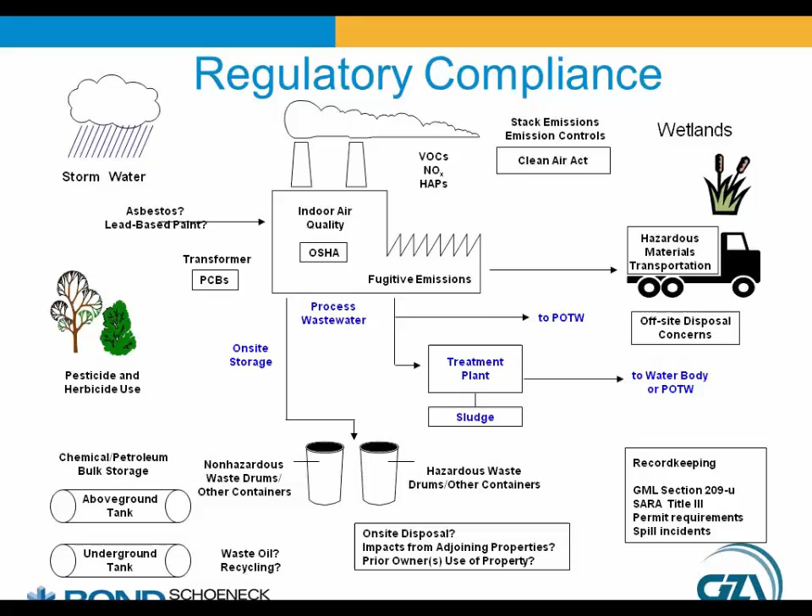But now, let's focus on what EPA considers to be an appropriate method for conducting a Phase 1 environmental site assessment. We start with EPA's approval of the use of the ASTM International Standard E1527-05 method in November 2006 to satisfy AAI. One of the advantages with the use of this method is that it looks for impacts of petroleum as well as hazardous substances. In fact, when DEC updated its Part 375 State Superfund Program, it specified the use of the ASTM E1527-05 method for AAI.

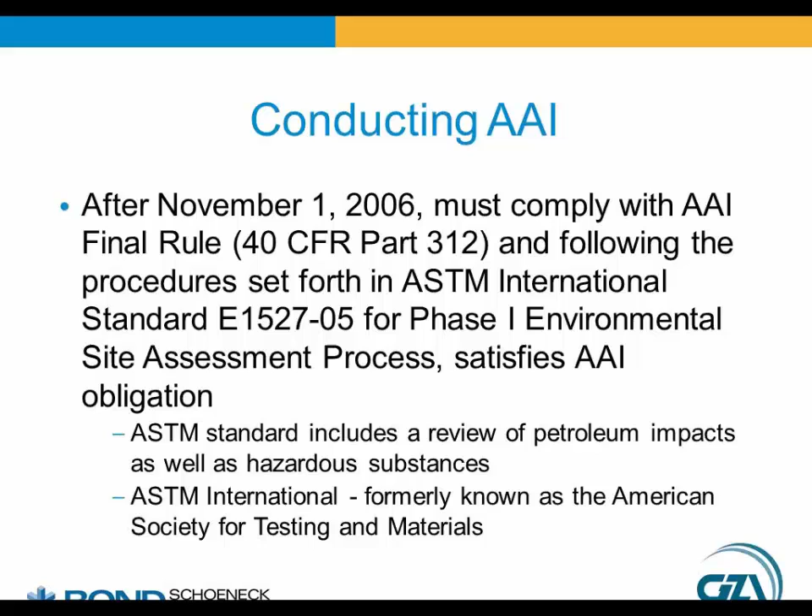ASTM then updated its Phase 1 ESA practice method with ASTM E1527-13. And EPA approved the use of this updated method as an AAI alternative in the December 30, 2013 Federal Register announcement. However, there was a concern about having both the earlier ASTM method and the updated method in play. So in June 2014, EPA proposed to delete the option of using the earlier method. In October 2014, it made the deletion of this earlier ASTM method final.

The due date for the exclusive use of ASTM E1527-13 for AAI compliance is October 6, 2015. This development was one of the drivers of this webinar. Note that this amendment will not affect the use of ASTM 1527-05 prior to the effective date of the new standard.

Before Ben walks us through the implementation of the ASTM E1527-13 method, I want to provide background on the two New York State programs that come into play in the Phase 1 ESA. They have a liability scheme similar to CERCLA and also look at the current owner and operator front and center in terms of liability for the cleanup of contamination.

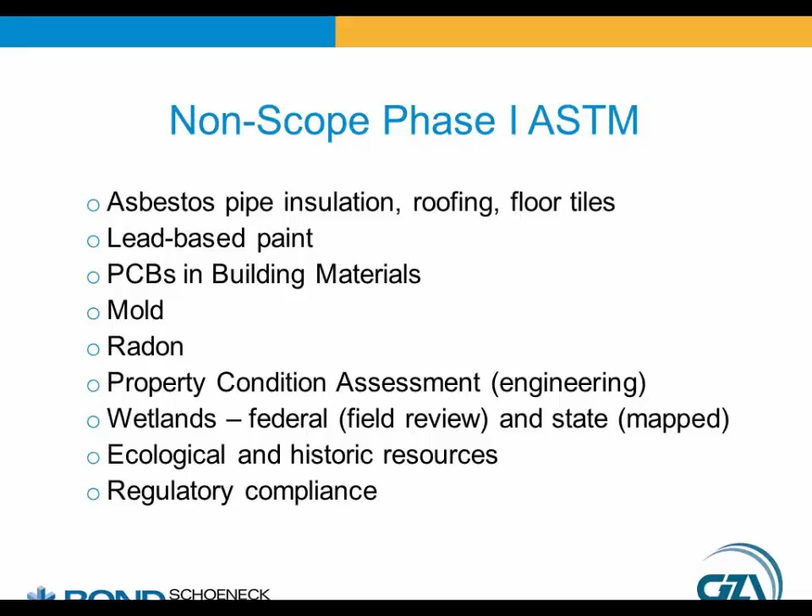As Barry discussed earlier, ASTM issued a new Phase 1 AAI guidance in 2013. What are the major differences between 1527-05 and -13? Let's focus on new and refined definitions. The addition of historical recognized environmental conditions and controlled recognized environmental conditions, also known as HRECs and CRECs. Definition of migrate was refined to include vapor in the subsurface. We'll discuss this in a bit. Indoor air quality, except where impacted by petroleum or hazardous substances, now is beyond the scope of the standard. And agency file reviews are now to cover adjacent properties.

Historical recognized environmental conditions, HRECs, include conditions that in the past may have been considered recognized environmental conditions, but have since been sufficiently investigated, remediated, and closed out with state regulators to residential or unrestricted standards. This can include items such as a once leaking petroleum storage tank that had been reported to the state, assigned a spill number, and cleaned up under a regulatory program such that the spill number was closed to unrestricted standards.

Controlled recognized environmental conditions, CRECs, are similar in that they do not at the present pose risks that would be associated with a REC. A CREC is a spill that has been closed out by the regulators with a risk-based approach, whereby the hazardous substance or petroleum remains in place, but analysis has determined that it poses no continuing threat to human health or the environment. This is often achieved by engineering controls such as placement of an impermeable cap over the contamination or the installation of sub-slab vapor mitigation systems in on-site buildings.

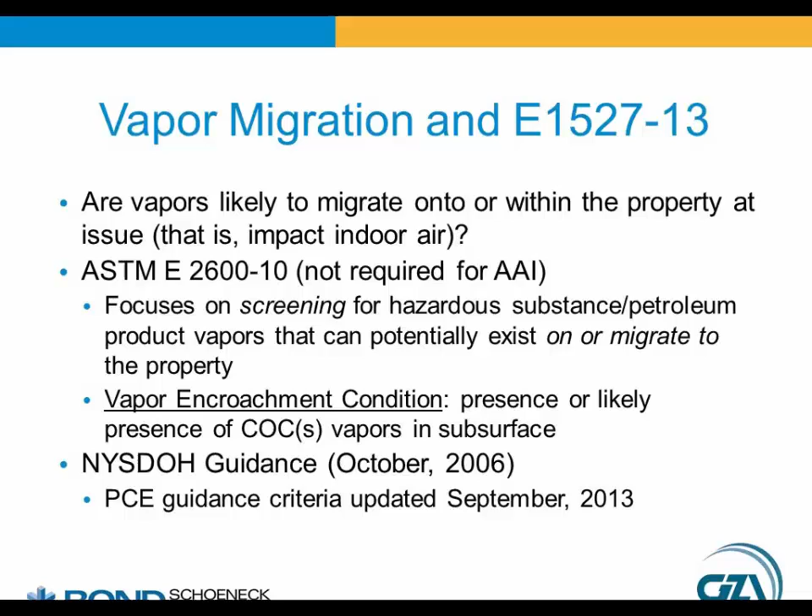I'll now walk you through a Phase 1 environmental site assessment. It is important to gather as much information up front about the property as possible. This allows for more efficient investigation. A user questionnaire is provided to the user of the Phase 1. Typically, this will be the purchaser, not the seller of the property. The user will provide any information they know that may indicate the presence of a REC, such as knowledge of past property uses, storage tanks, environmental proceedings, and any property documentation, such as surveys and as-built construction drawings.

Federal, state, and local records are reviewed. As discussed earlier, this now includes the subject property and adjacent parcels. Historical information is researched. Data can include historic aerial photographs and topographic maps that can be used to determine past uses of the site. For example, where former buildings, rail lines, or storage tanks were located on the property. City directories are reviewed to determine what types of businesses previously occupied the property. This can identify long past uses, such as a dry cleaner, that could have a negative impact on property redevelopment.

Geologic and hydrogeologic data are reviewed to determine the likely flow of groundwater, which could determine the likely transport direction of off-site contamination. An agency file review is one of the most important steps in the AAI process. Through Freedom of Information law requests, environmental records from state and local agencies that are publicly available, practically reviewable, and reasonably ascertainable can provide a comprehensive environmental history of the property. While this review is ideally completed prior to a site visit, they do take time, typically 10 to 20 days for a response. Complex environmental sites can add additional review time.

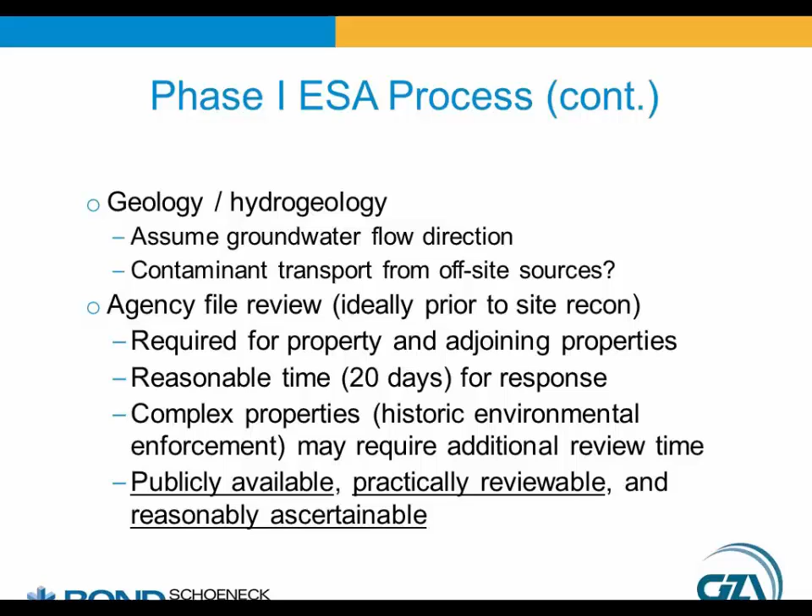Ideally, all the previously mentioned background data collection has been completed, so now it is time to visit the property. During site reconnaissance, we are primarily looking for visual evidence or the potential for RECs or conditions that suggest HRECs or CRECs. We look for evidence of releases, such as petroleum staining or sheens. Such staining is typical of auto repair shops, retail gas stations, and maintenance yards.

Chemical and bulk petroleum storage, including above ground and below ground storage tanks. The condition of these tanks is noted. A corroded tank poses a much greater threat than a new one. However, it is important to note if the tank simply has a fresh coat of paint designed to hide defects. Hazardous and non-hazardous waste storage and management areas and practices are observed. Are waste streams kept separate? How is waste oil handled, stored, and disposed of?

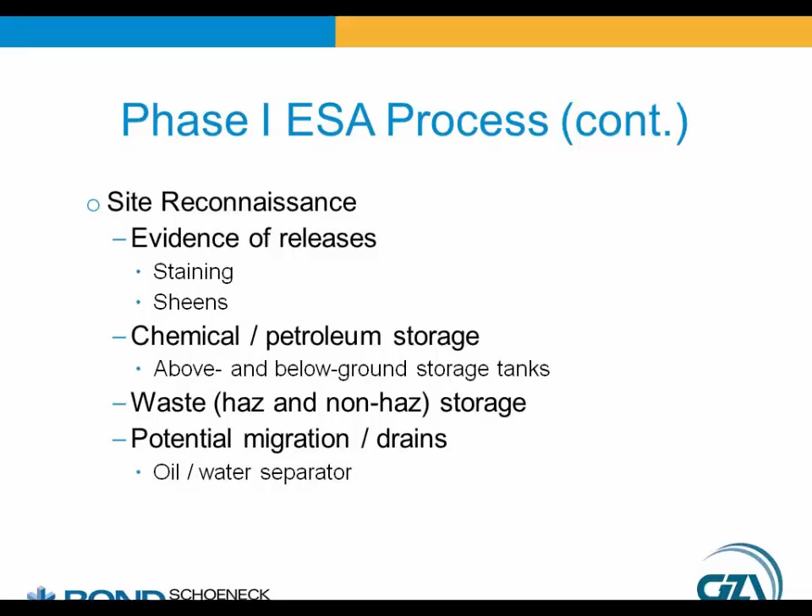The potential for pollution migration, such as floor drains and oil water separators, is noted. Often, floor drains will lead to an oil water separator, which, if it isn't operating properly, can cause the release of oil or other substances to the environment. Utilities are identified. Is the property heated with municipal natural gas or on-site fuel oil? Does the property use a private septic tank into which contaminants from drains could be accumulating? Is there a private well that could be drawing in adjacent contamination?

Evidence of past contamination can be used to identify RECs, HRECs, or CRECs. Such evidence can include groundwater monitoring wells, stockpiled soil, or waste drums. It is important to compare these items with records obtained from the agency file review to determine if regulatory action has been taken on the property.

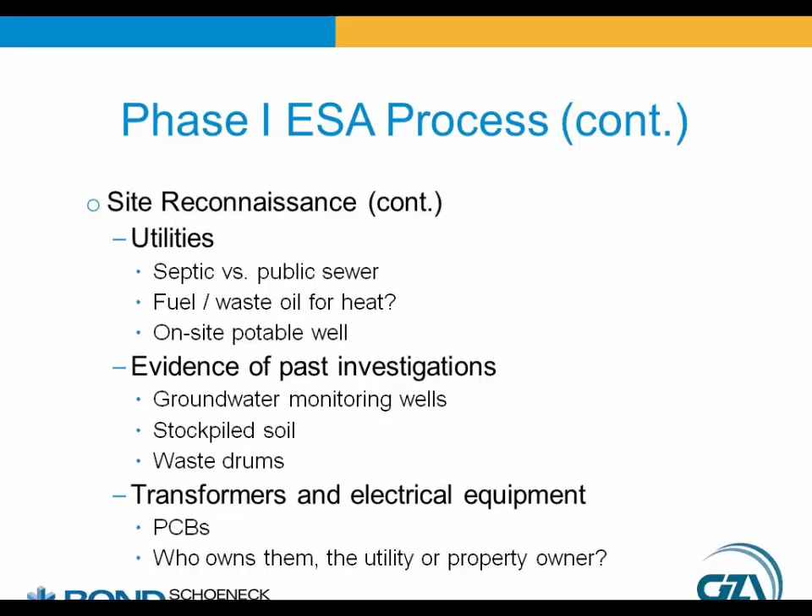Transformers and electrical equipment can suggest the presence of polychlorinated biphenyls, PCBs. PCBs are a main and expensive chemical concern for many high-profile environmental remediation projects in New York. Ponds, lagoons, and impoundments are important to note, as they can provide a contaminant pathway to soil and groundwater. Do they contain fresh water or a waste product from an industrial process?

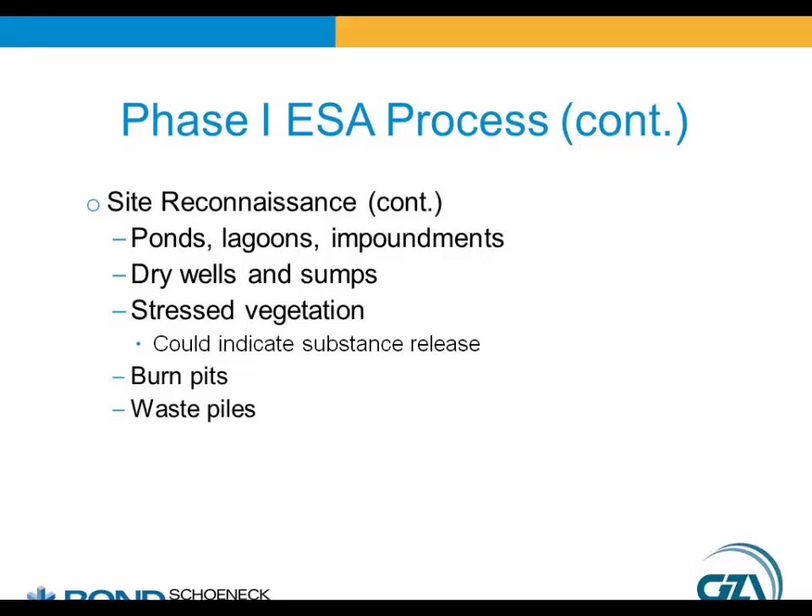Likewise, dry wells and sumps can provide a direct contaminant pathway to soil and groundwater. Stressed vegetation can be indicative of a petroleum or hazardous substance release. And finally, burn pits and waste piles can likewise be sources of contamination, particularly solvents and heavy metals.

Interviews provide valuable information. Current owners and occupants can explain the uses of the property and any processes that may pose a threat to the environment, as can previous owners and occupants. However, it of course depends on how forthcoming they are. We'll talk about that in a minute. Local government officials should be interviewed to see if they are aware of any such threats, such as past fires, illegal activities, or dumping.

Data review and site reconnaissance observations and interviews are evaluated and compiled into a report for the user. This report includes a discussion of data gaps. These are areas where an environmental professional was not able to obtain adequate information to evaluate the possibility of RECs. Identified RECs are called out and discussed. A vapor intrusion evaluation is included, whereby the likelihood of vapor migration is reviewed.

A section of the report will include limitations and reliance information, where the environmental professional has explicitly written out limitations to the report and who may rely on it. Limitations should first be presented to the user in the environmental professional's proposal prior to engaging the work.

Data gaps occur when the ability to obtain required information, despite good faith efforts, is hindered. These can occur from the lack of access to the property or parts of it, the lack of historical records, key personnel being unavailable for or unwilling to provide interviews, or the current owner and occupant being uncooperative.

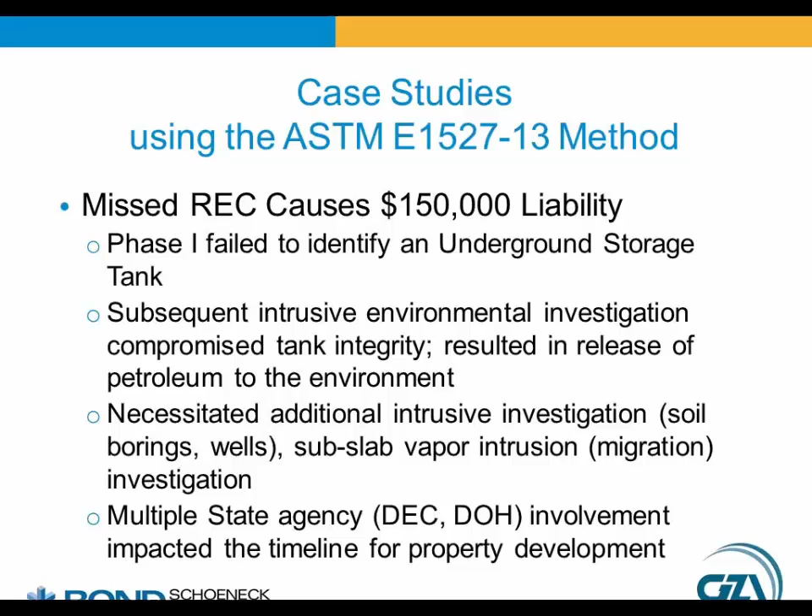Multiple state and local agencies became involved, including the New York State DEC and DOH, complicating the timeline for site redevelopment. The proximity of the incident to the property building resulted in negative impacts to daily operations and required consideration of the building's foundation integrity during impacted soil excavation.

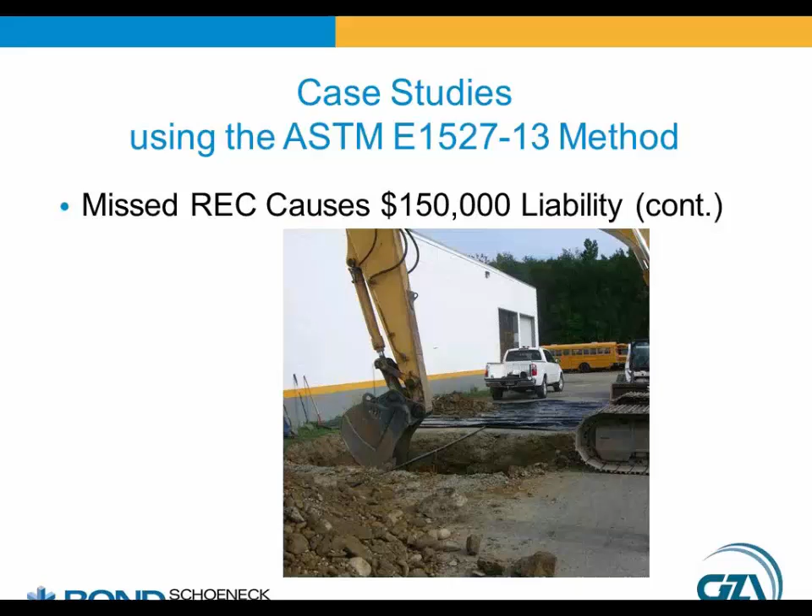Soil excavation this close to the building footers required careful and deliberate work and consideration of the foundation integrity. The second case I have for you is much more uplifting. A proper Phase 1 ESA was completed and assisted in determining environmental remediation costs. These costs were factored into the purchase price of the property. Upon successful remediation, a blighted vacant property was redeveloped into a successful commercial business.

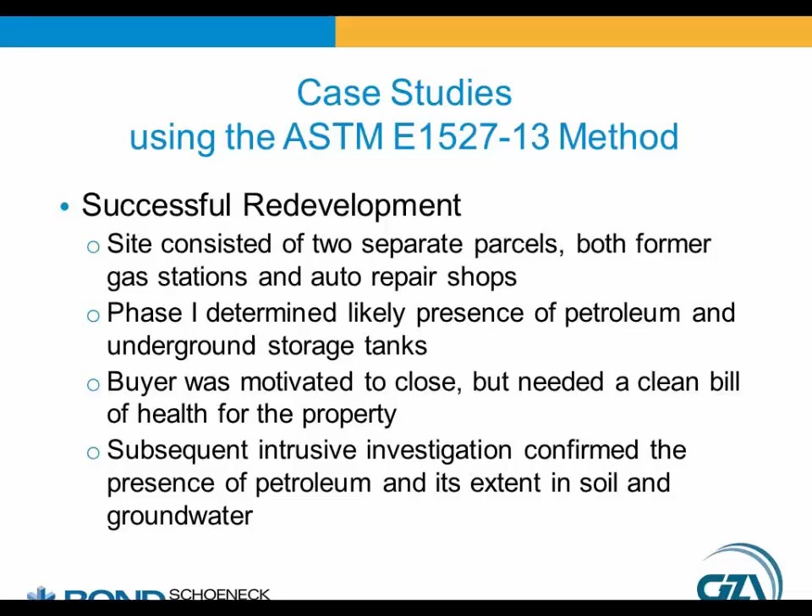The property consisted of two separate parcels, both former gas stations and auto repair shops. The Phase 1 determined the likely presence of petroleum and underground storage tanks, both RECs. The buyer was motivated to close, but needed a clean bill of health from the seller. Subsequent Phase 2 subsurface investigations confirmed the presence of petroleum contamination. An estimate of $400,000 was developed for remediation, including regulatory closure of underground storage tanks, and factored into the sale.

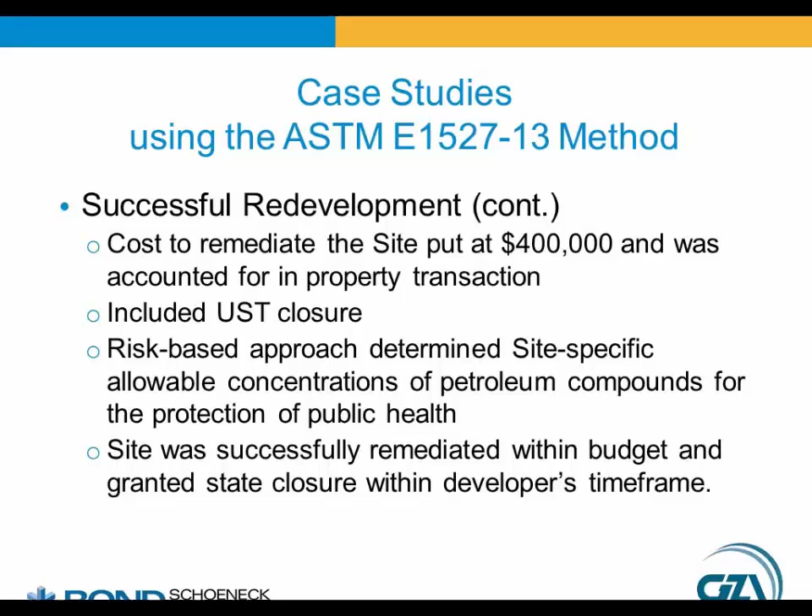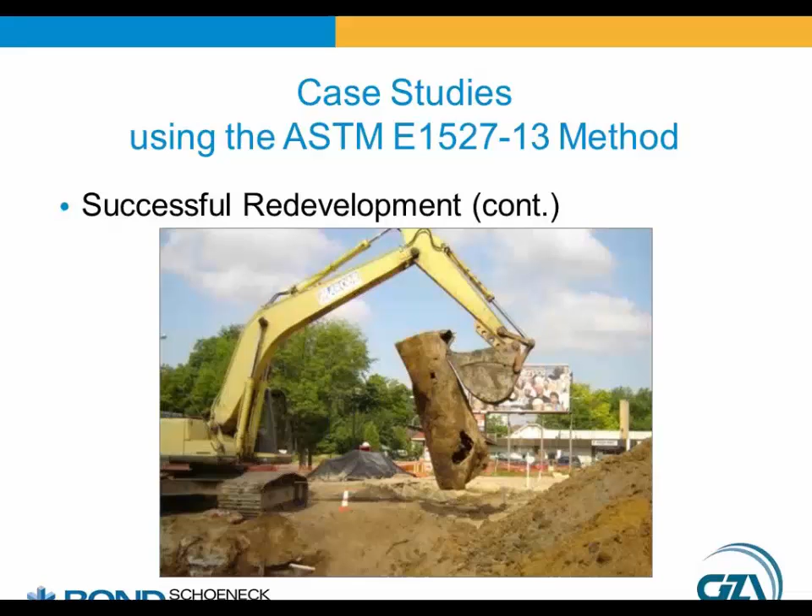A risk-based approach was developed to determine allowable site-specific concentrations of petroleum constituents for the protection of public health, essentially creating a controlled recognized environmental condition. The site was successfully remediated with cooperation from DEC and DOH and granted regulatory closure within the developer's time frame and on budget. Here we see one of the underground storage tanks being removed during remediation. And upon completion of remediation, the building went up and development continued as normal.

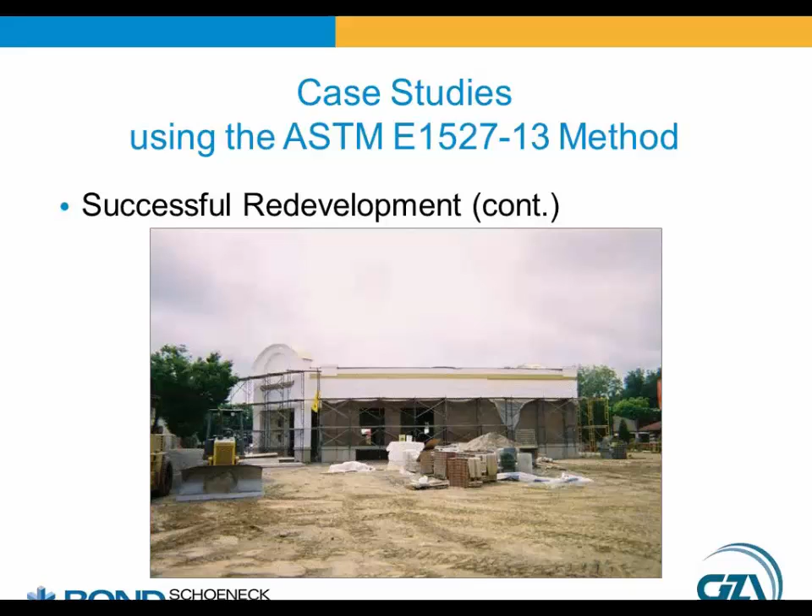The presence of RECs may result in performance of a Phase 2 subsurface investigation. This investigation aims to quantify what contamination, if any, was contributed by the REC to the surface and subsurface. It typically entails soil, groundwater, and surface sampling and can fill in data gaps identified in the Phase 1. It is important to note that if contamination is confirmed, a spill may need to be reported to the state regulatory authority. The onus to investigate and remediate this spill, along with the associated costs, then falls on the property owner, not necessarily the user of the Phase 2.

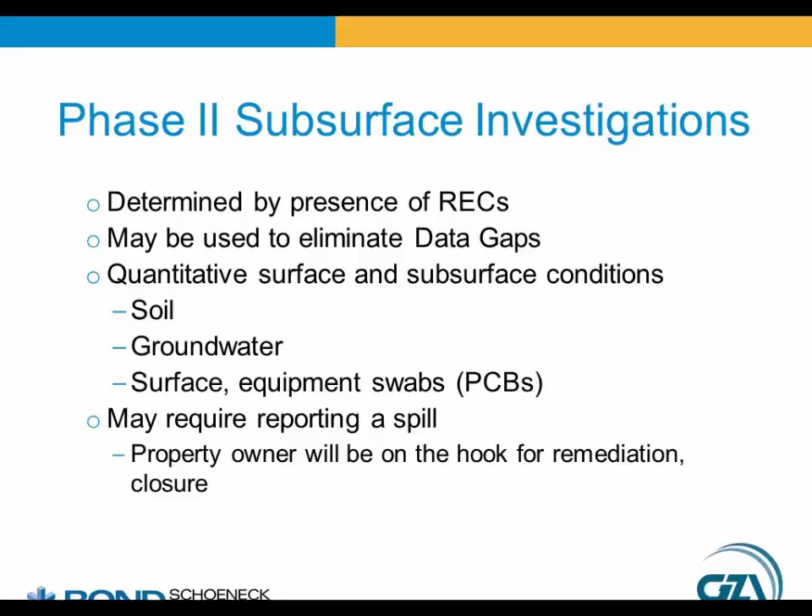Sure. Relevant experience would come from assisting with this sort of investigation in the past. Maybe not necessarily being the environmental professional, but assisting the environmental professional. It includes other environmental work such as site investigation, remediation, participation in regulatory guided projects for investigations and remediations. Okay. Can someone who does not qualify still be on the team? Yes, as long as they are working under the environmental professional.